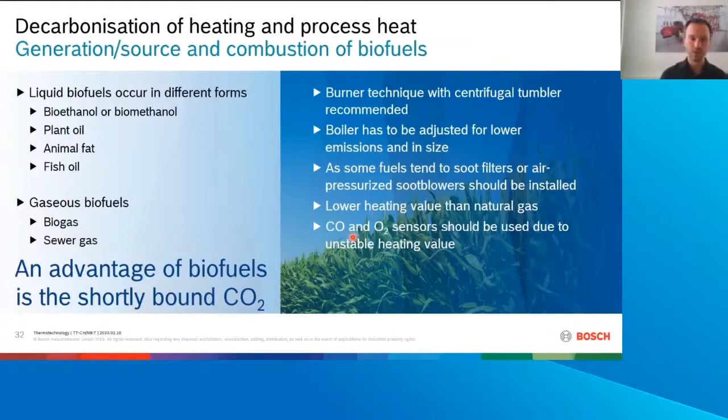For the gases, most of them have lower heating values than natural gas. You have to, again, put more gas and air through the systems. And of course, you should use a combustion controlled technology.

I'm almost through with it, just showing you how such a system could look, because we design every boiler depending on the application. I don't know any boiler that has been produced twice here. In this case, it's in Denmark for the company Vattenfall. It's a huge energy company that produces electricity and district heat. And there they have a plant oil.

And the topic is that it is clogging up the system because of the combustion that's natural with this fuel. They had to clean it up to three times per day, because they want to get the heat transfer surfaces clean again, because only if they are clean do they work efficiently. Otherwise, they use lots of fuel and have a high exhaust gas temperature. In this case, they use, as I said, a rotary atomizer, so a rotating cup burner.

And here you see all these lines in the front of the boiler. There they have pressurized air and fully automatic cleaning, because you can't open the boiler, clean it three times per day, let it get cold, heat it up again, and so on. That creates inefficiencies. And here the efficiency is not as good as with natural gas, but still 93% is huge. In the US, many boilers are running at like 84%, and they're proud of it. But it's always a question of how expensive your fuel is.

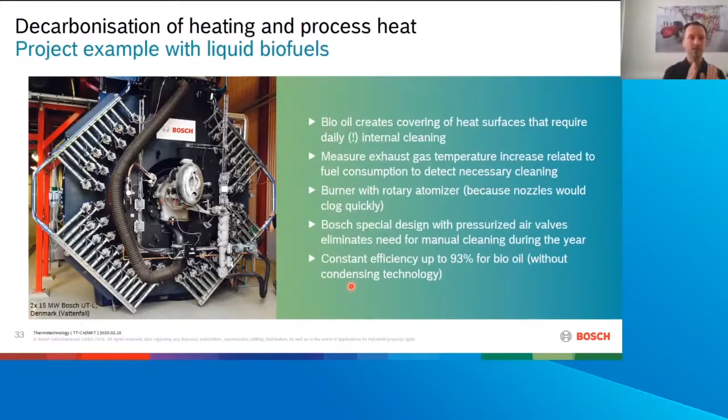And so this is a very good value, considering also it's without condensing technology, meaning exhaust gas temperatures roughly at 130 to 150 degrees. With condensing technologies, we achieve the lowest temperatures, coming from 1,700 degrees of combustion down to, let's say, 57 to 59 degrees Celsius exhaust gas temperatures. So we are really using all the energy.

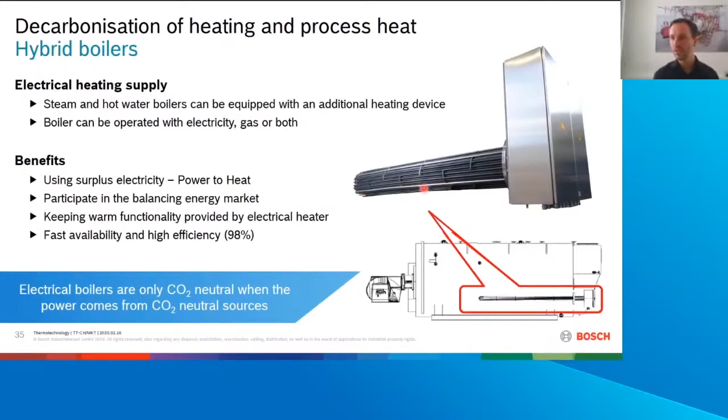Before I finish, let me show you a quick glance on electrical systems, because green power can also be used directly without transferring it to hydrogen, if I have it locally. And here we can implement electric coils inside the boiler, in this case up to 5 megawatts so far, probably later some bigger ones. And if it's green electricity, then of course this will be CO2 neutral.

When do people do this? One reason is they have very cheap electricity prices, of course. They use it also for warm keeping, to not switch on and off the burner all the time. When they have excess electricity, because they have local electricity production and they don't get a lot of money when they put it back in the grid.

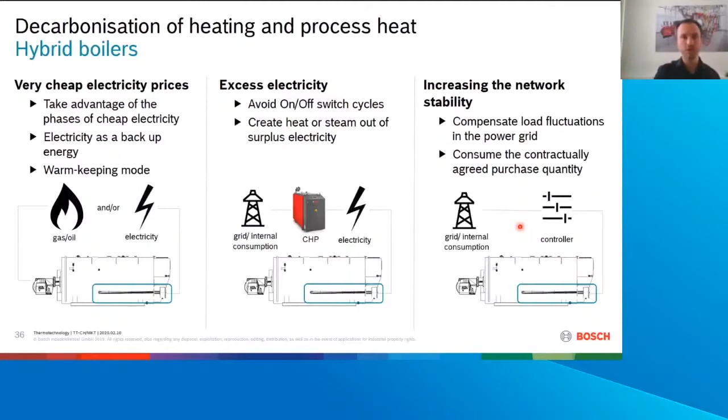And also for network stability. So sometimes they get some benefits from their power company if they consume in a continuous way. And then, of course, such a heating element can be an important factor to realize this, because the boiler is very flexible on which fuel he is using.

Last but not least, of course, if you are producing electricity locally, it's rather a combustion engine or a turbine, and then you have exhaust gas from them. This is very hot, and you can still use this energy. There it's possible to use, for example, a full waste heat recovery boiler for exhaust gas. Also just use it partially here, introducing it in the fourth pass of this 3-pass boiler plus the fourth pass, or also using it instead of a burner.

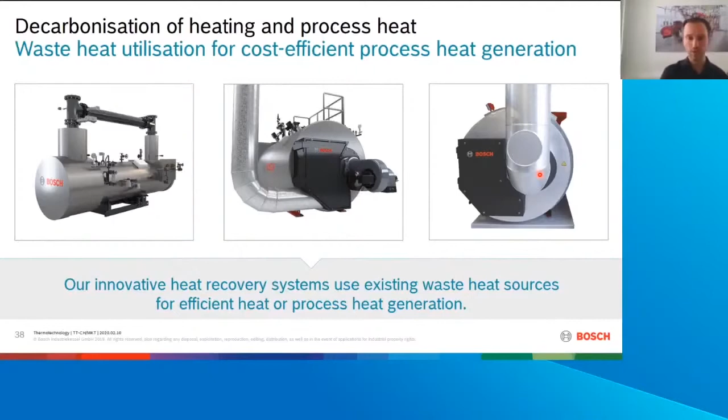Of course, this is kind of CO2 neutral because the exhaust gas was already generated. You don't create additional CO2. And you can save lots of energy with it. Our typical applications are behind engines, behind gas turbines, also in glass works, so production of glass, steel mills, steel production, and cement factories.

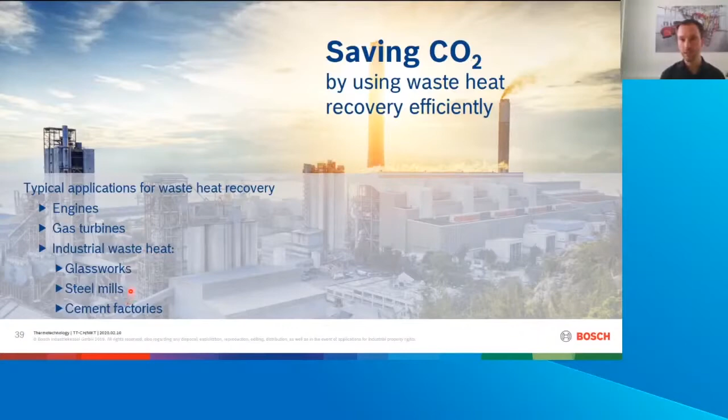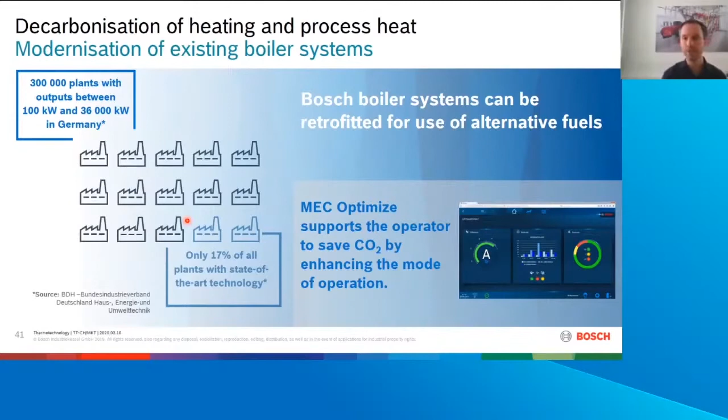Finally, but I will keep this very short, optimization of existing boilers. If you look even in a high-tech country as Germany, 83% of all boilers are inefficient because they are very old, average age between 20 and 30 years. And there's lots of opportunities how to save energy there, be it on heat recovery, switching the fuel, also of course to hydrogen, by better controls, better optimization of the burner, saving electricity, water treatment, using condensate, and several other options. But that shouldn't be the topic here today.

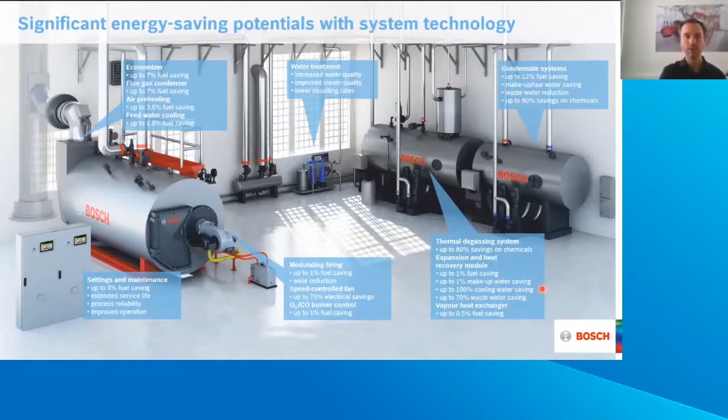The coolest thing about this is it's quite cheap, it's known technology, and the return on invest on these topics is usually between 1 and 2 years, so much quicker than a complete renewal of a huge system.

That's the nice thing compared to also other options to produce it. And they put it back in the bottle, so they don't need an additional CO2 source, because they said, we already have a CO2 source, you just need to make it consumable. Also, for example, when you have milk powder and you have, instead of air, another gas inside, so it doesn't go into oxidation, then this is an option.

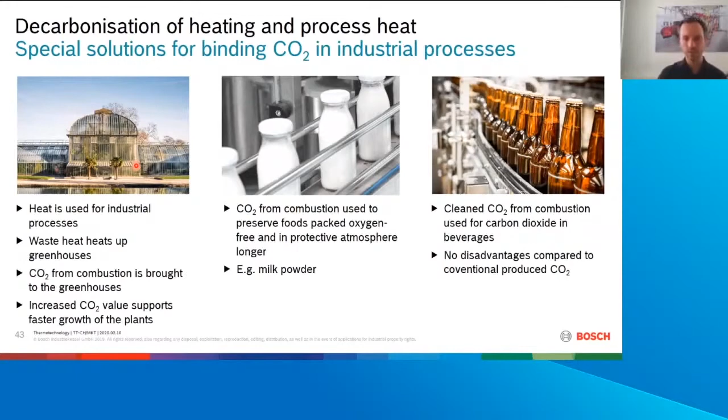And in colder countries, when you grow stuff in a greenhouse, they saw if they put additional CO2 in the air, that the plants are growing quicker with larger fruit, and therefore they introduced clean boiler gas into the greenhouses. They do this a lot in the Netherlands and also in Russia.

So summing it up, finally, before we go into the discussion, already now, a 20 to 30% increase of efficiency in many existing systems is possible.

So I always encourage customers to look at that, even if it's not our main business, but just for the sake of environment. You can also prepare the systems there for different alternative fuels like biofuels, etc. Some few companies will have hydrogen available, and if they have, then of course it's an option to burn it and just get water instead of CO2.

Or if you have it from green power, think about introducing electric systems, perhaps also as a combination. During the day, electric operation when the sun is shining, at night, use the hydrogen. Then you have a very much higher overall efficiency. So therefore, I see hydrogen as a major fuel in the long term of process heat and heating, and also the topic of synthetic fuels that are generated from hydrogen in order to make it easier to transport, to use, safer to handle.

So in my opinion, my personal opinion, it will be an essential topic for the factory of the future, for the mobility of the future, and even in our personal lives, but this will be in the long term. The biggest effect for nature, CO2-wise, will be if we introduce technologies like these first for commercial and industrial applications, because the number of participants we have to reach in order to have a huge effect is much lower.

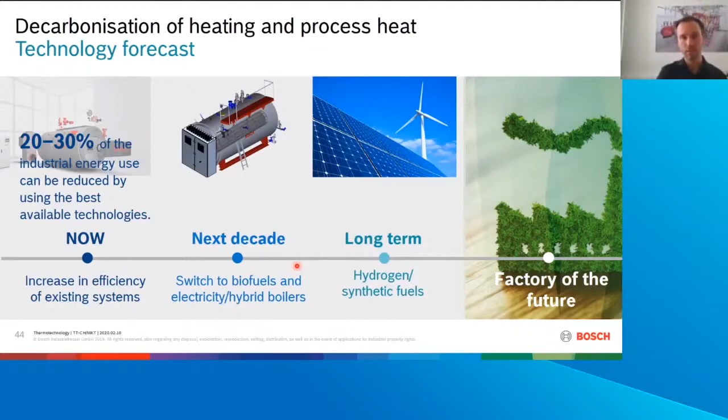Technology is available and also much more affordable. And in many countries, they also get subsidies for it because governments have their own CO2 targets and want to help companies to realize it. Therefore, my recommendation, check your existing systems. You will be surprised how much part of your CO2 footprint actually comes from process heat and heating.

Check for subsidies. Perhaps you get innovative technology for free or subsidized. Check which fuels will be available in the future and make your systems ready for the future already now. Prepare for it. And of course, subsequently, if you have something available, introduce it because your kids will be thankful for it. I have one on the way at the moment as well myself. And so I'm thinking about what her future will be. And I want for her to have a clean and safe planet. Therefore, this is also a really personally important matter to me.

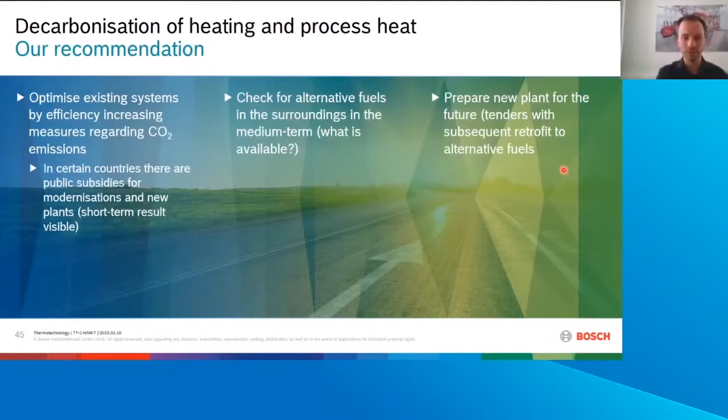Also, of course, transfer your knowledge, share your knowledge, and try to grasp knowledge from other sources, other countries. Look to Japan. They are very long already working on the topic of hydrogen. They are using it even in the personal sector already. And hydrogen is a competitive factor. If Chile or another Latin American country becomes a major supplier of hydrogen on the market, I think this is an important topic for the future compared to, for example, rare earth for mining or something that's somehow limited. Green hydrogen is unlimited. You need water, you need sun, and it's universally applicable. Therefore, in my opinion, technology of the future.